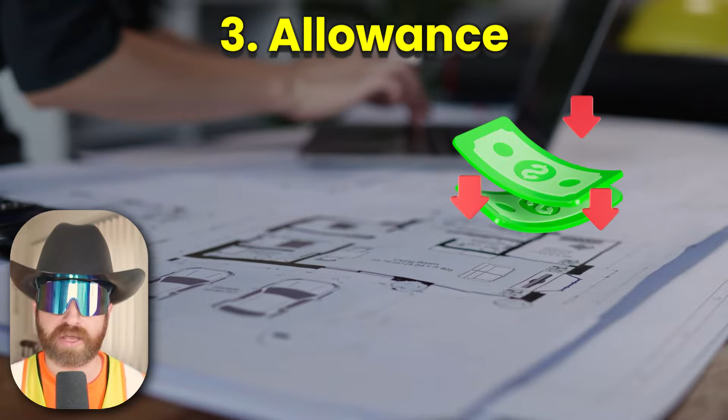Next up, we have AHJ, or Authority Having Jurisdiction. The AHJ refers to the local, state, or federal agency responsible for enforcing building codes, safety regulations, and issuing permits. Then we have allowance. An allowance is a sum of money incorporated into the contract sum in order to cover the cost of a particular scope, which isn't fully described or known in the contract documents.

At number 4, we have alternate. An alternate is a specific aspect of scope which is outlined during the bidding phase and to be priced separately from the base bid, which can later be added or deducted from the base bid amount if selected by the owner, providing the owner this option at time of bid and bid award and selection.

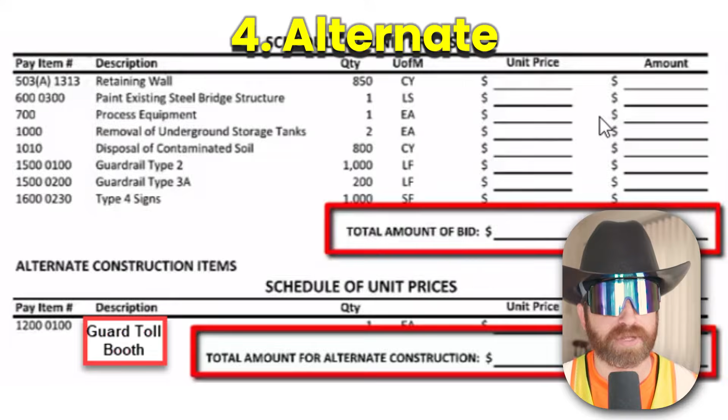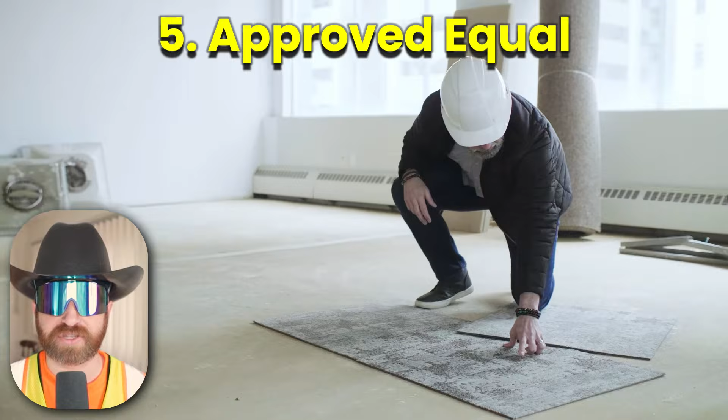Moving on, we have approved equal. Architects and engineers will typically outline a basis of design in the specifications, which is essentially the must-use material or equipment the contractor has to utilize. However, they will sometimes allow approved equals. This means the contractor can suggest the use of an alternate material or equipment, which then has to be approved by the design team and/or the owner prior to purchase and install.

Okay, now we're looking at Architect's Supplemental Instructions, or ASI. An ASI is a formal document issued by an architect or engineer to the contractor that provides some clarification, minor changes, or additional information just to clarify the intent of the original construction documents. ASIs are typically used for changes that do not affect the project cost or time, such as specifying a paint color.

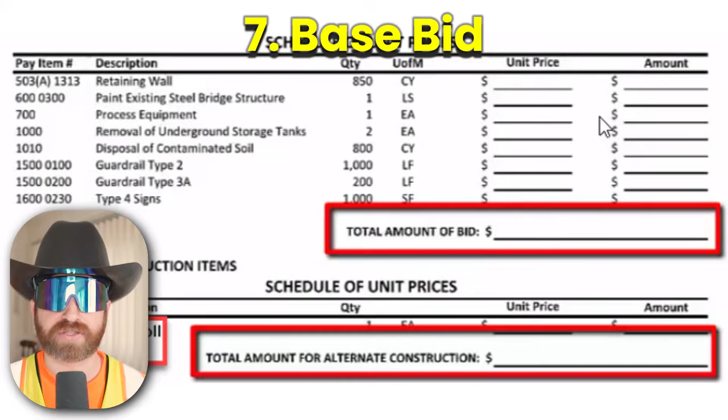At number 7, we have base bid. A base bid is a contractor's price submitted for a project scope of work. However, it excludes any additions, deductions, or alternate pricing options.

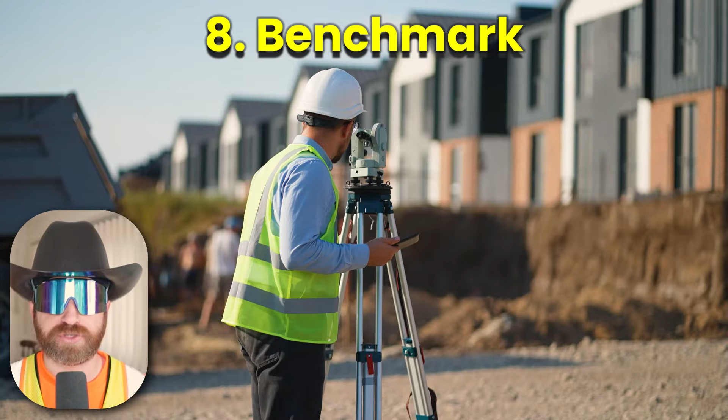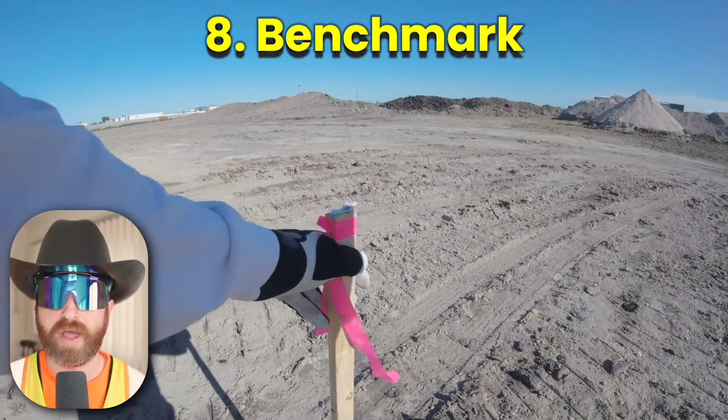Okay, let's move on to benchmark. Now, a benchmark, which is often referred to as a site control point, is a physical marker somewhere on the job site which does not move or change. It is a confirmed elevation and location marked by a surveying company that the remainder of contractors use to confirm their elevations for the installation of work.

Okay, now we have bid leveling. Bid leveling is the process of reviewing bids within the same bid package and is to ensure that the pricing between different contractors is just apples to apples. This is to help ensure that the scope is being priced completely and consistently across the board.

All right, a pretty simple one, blocking. Now, blocking is just short pieces of lumber used to fill, join, or reinforce a building structure. Blocking is installed where material is being fastened to a wall to ensure additional support, such as casework uppers, grab bars, etc. Moving on, we have burden. Now, burden refers to the indirect costs of employing a worker beyond their hourly wage, which includes expenses like Social Security, workers' compensation, any health insurance, paid time off, and more.

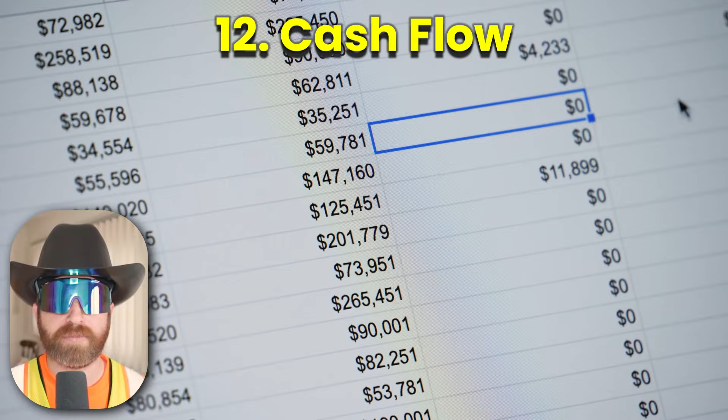Then we have cash flow. Construction projects typically involve 30, 45, 60-day payment cycles from the time you submit your payment to the time you're paid, sometimes even more. A cash flow is a forecast typically created in an Excel document of expenses such as labor, material, and equipment versus income or payments over time. Cash flows are typically forecasted on a monthly basis and are used to help construction companies and owners understand the ins and outs of payment requirements.

Following that, we have closed shop. Now, closed shop was a term used to describe areas of the country where employees were required to be union members as a condition of employment. Closed shops were deemed illegal in 1947 under federal law.

We're going to keep going with conceptual estimates. A conceptual estimate is an early cost projection based on limited project data, details, and documents, typically provided to an owner by a contractor or architect to ensure the owner is in alignment with the potential costs prior to the next steps of design and detailed estimates.

At number 15, we have constructability. So constructability refers to the ease in which the contract plans and specifications can be executed during the construction phase. Constructability review may influence design modifications during the project's design development phase. Okay, consumables. Construction consumables are expendable materials used up during a project that are not part of the final structure, such as drill bits, saw blades, grinding wheels, fuels, etc.

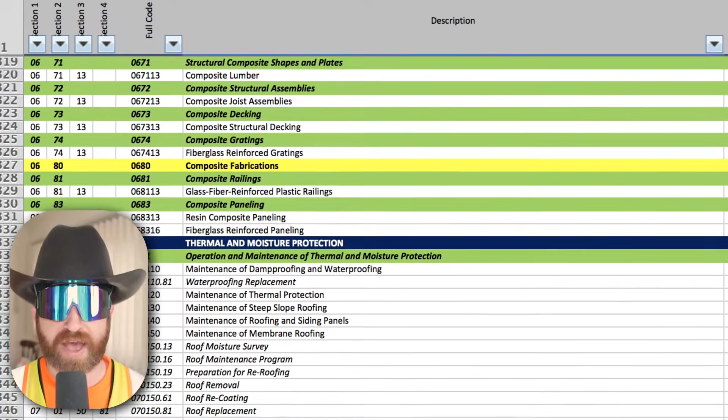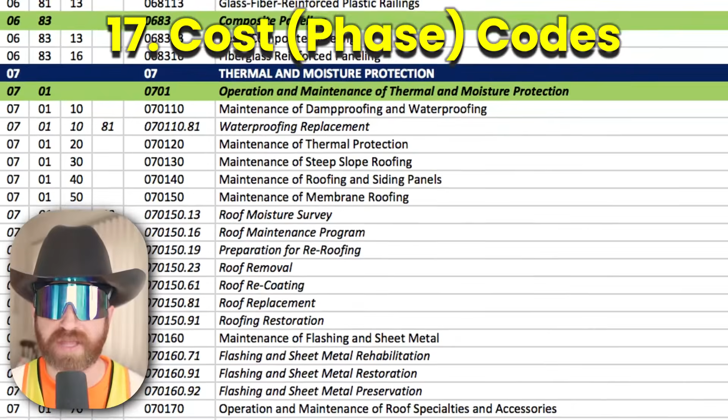Moving on, we have cost codes. Construction cost codes, or sometimes referred to as phase codes, are numeric identifiers used to categorize and track project expenses like labor, materials, and subcontractors for specific activities.

Then we have critical picks. Now, a critical pick in construction is a lift that carries a high risk completed by a crane, often requiring extra planning and safety measures. These lifts are typically defined by exceeding 75% of a crane's lifting capacity, requiring more than one crane, or when the load is outside of the operator's view.

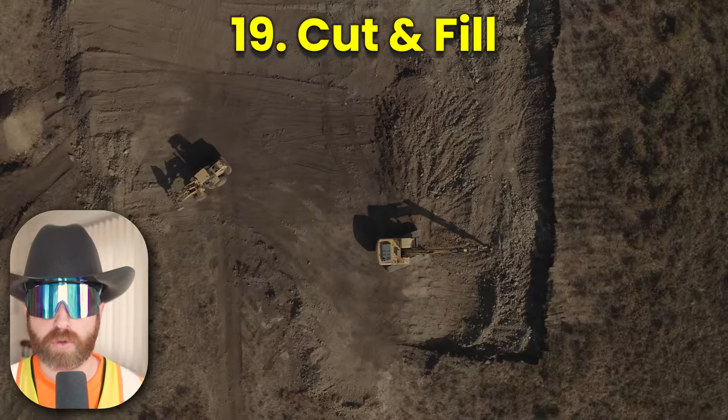Then we have another on-site term, cut and fill. Now, cutting and filling is the process of just moving earth from high elevations, which would be considered cuts, to lower elevations considered fills. Then we have daily reports.

Now, a daily report is a document filled out by a foreman or a superintendent at the end of every working day on a project or throughout the day. It captures things like weather, types of work activities taking place that day, inspections that took place that day, number of individuals on site, any safety items to record, in addition to many other items.

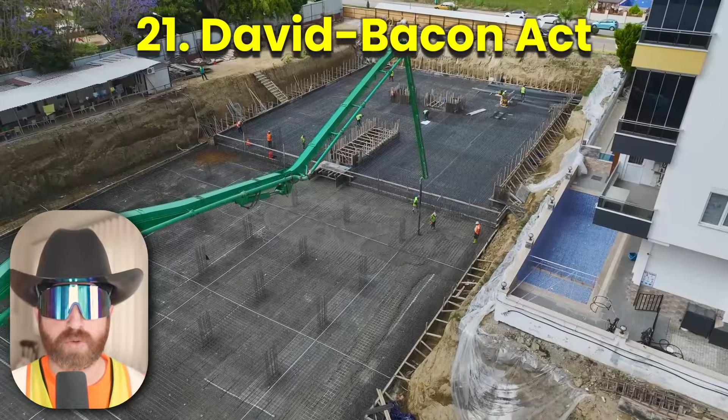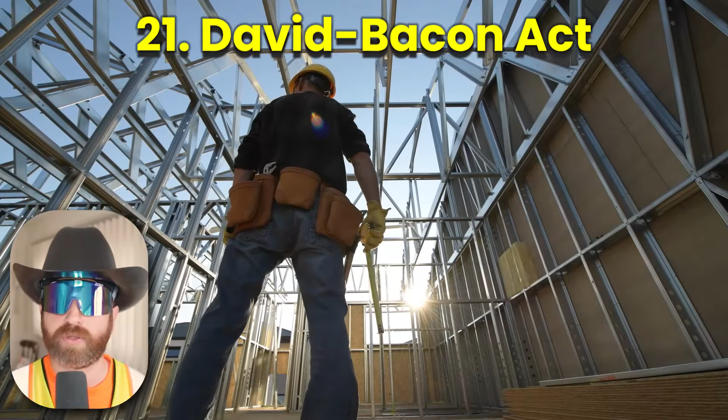Okay, the Davis-Bacon Act. So the Davis-Bacon Act requires that all contractors and their subcontractors performing federally contracted work in excess of $2,000 pay no less than the prevailing wage and fringe benefits for that geographic location where the work is being completed. All right, I'll cover prevailing wage later on in this video.

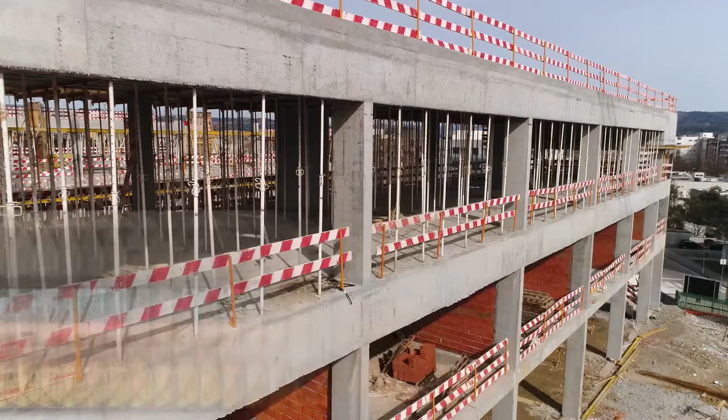Okay, getting back to business, we're moving on to dead load and live load. So dead load refers to the weight of the actual structure or building, which includes all permanent components. The live load refers to everything that is essentially movable within the building, such as furniture, people, and any other movable equipment. Now we have DFH, which is short for doors, frames, and hardware.

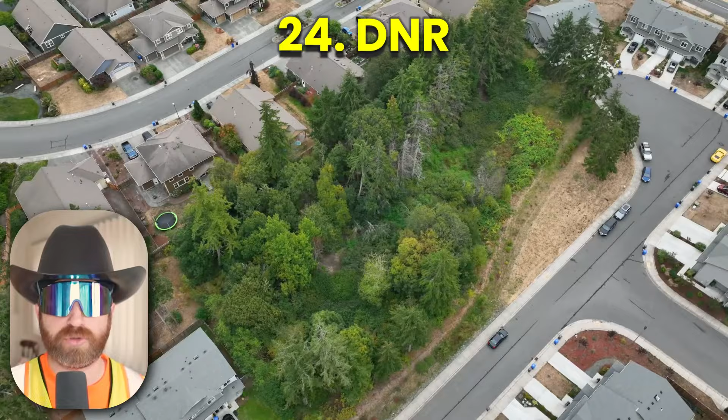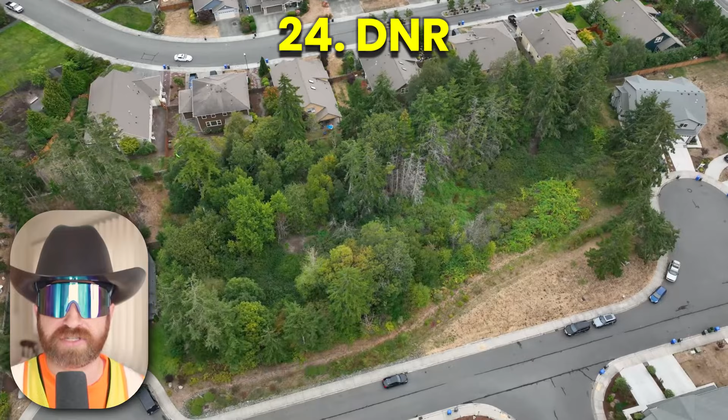You'll often hear or see doors, frames, and hardware scope abbreviated as DFH, so I'm just throwing it out there for simplicity. Moving on to DNR. Now DNR stands for the Department of Natural Resources, and this is typically applicable to site improvements or related permits where the DNR is involved with stormwater runoff and management and establishing no-build areas such as designated wetlands or protected land. After that, we have draw or payment application.

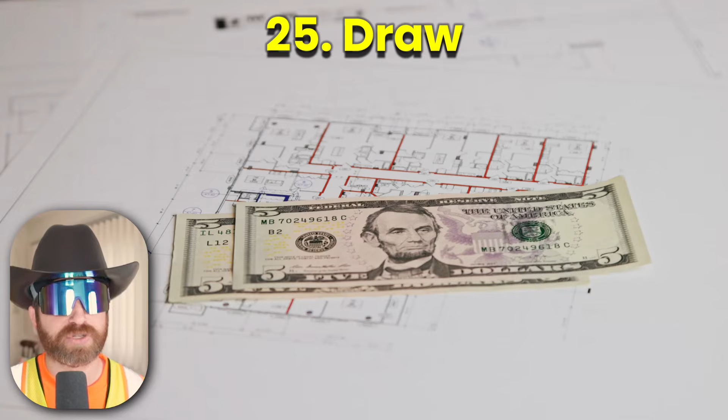Now, a draw in construction refers to the payment application where a contractor submits a bill to a general contractor or the owner directly for approval of payment, typically on a monthly basis, which is based on work performed or completed to date. Then we have easements.

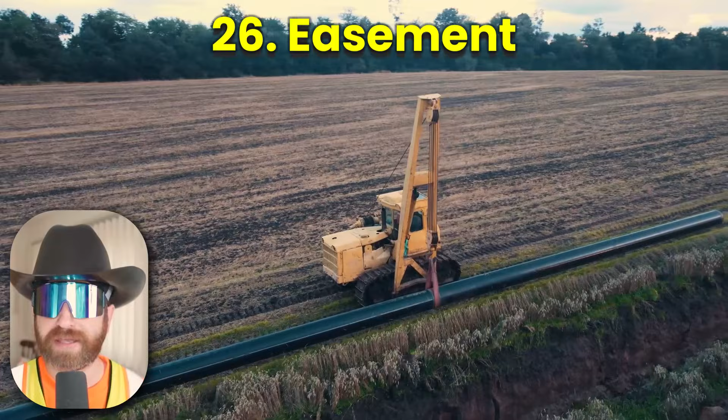An easement is a legal right for someone to use a portion of another's property for a specific purpose. For instance, public utility companies typically have easements onto other properties for the extent of their underground electric and internet data lines that make their way into the building. This allows the public utility company to access that portion of land to service those utilities. You typically cannot build on easements without signed approval from the easement holder.

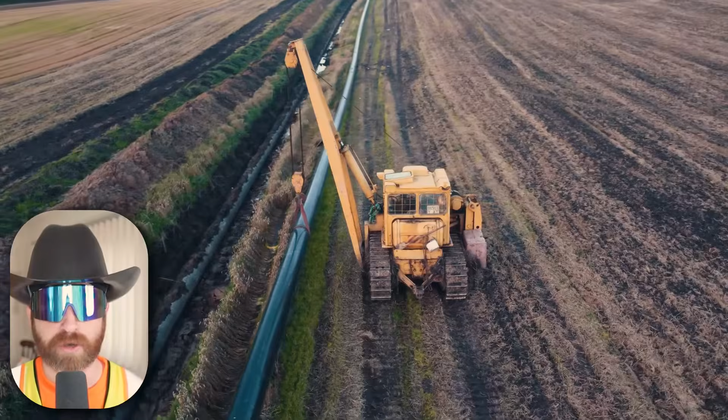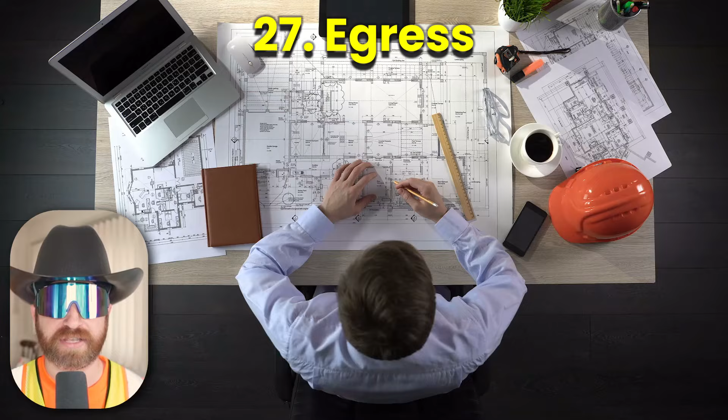Up next is egress. So egress is a continuous, unobstructed path for people to exit a building and reach a public way such as a street in a safe manner. Egress pathways are based on occupant load and other safety code requirements.

At number 28, we have EMR. Now, EMR stands for Experience Modification Rate or Rating, which is based on a company's worker compensation claim history compared to the average of its industry and size. It's essentially a company's safety rating, with 1 matching the industry average, any number under 1 is better than the industry average, and anything above 1 is worse than the industry average. After that, we have envelope.

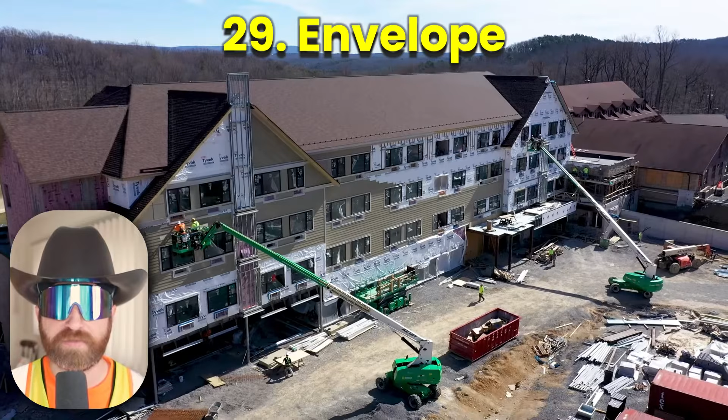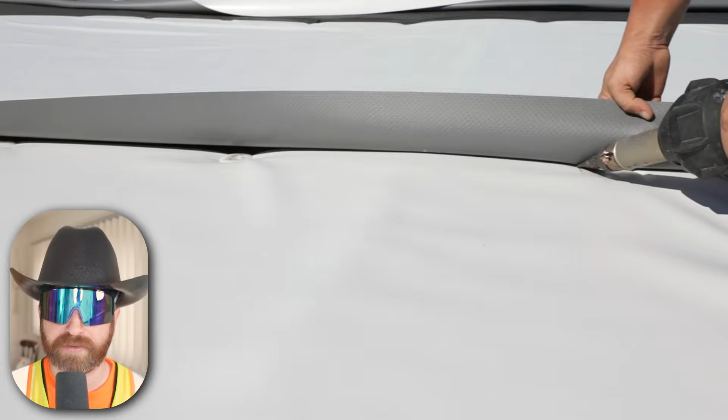Now, the envelope of a building stands for the outer structure, where the waterproofing elements of a building enclose the outside from interior conditioned spaces. Moving on to another site or earthwork term, we have erosion control. Now, erosion control in construction involves the use of barriers or physical controls to prevent soil erosion during the course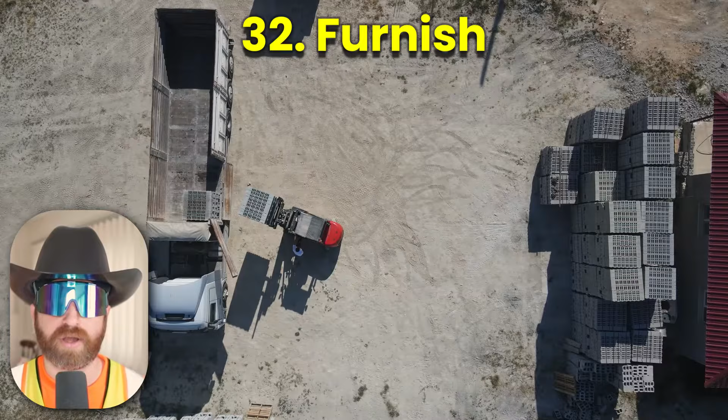of a construction project. Next up, we have FF&E, and FF&E is just an abbreviation used to denote furniture, fixtures, and equipment on a construction project. Then we have the term furnish, which is oftentimes found in contracts and in construction. To furnish something means to supply and deliver materials, equipment, or labor to the job site so that they are there ready for use or install.

Okay, now we've got a scheduling term with a Gantt schedule. A Gantt schedule is a visual representation of a project timeline using horizontal bars to show tasks against a calendar. Back to our earthwork, we've got grading. Now, grading is the process of reshaping land on a construction project. A site grade is an established point set by a civil engineer in the construction documents that an earthworker would use to establish the height of the reshaped land.

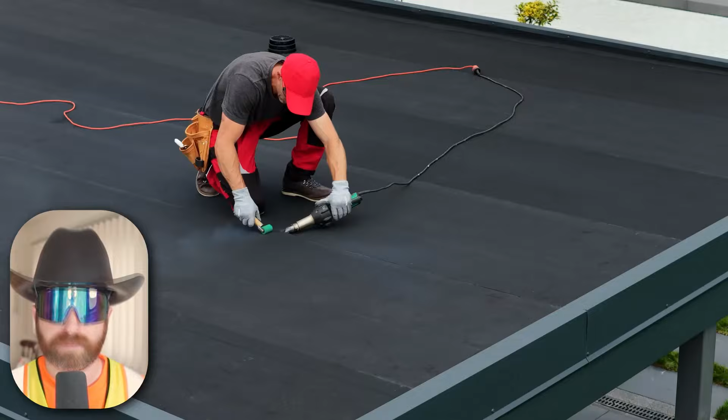All right, green building. Now, green building in construction is essentially the practice of designing, building, and operating structures to be environmentally responsible and resource efficient throughout their entire life cycle. At 36, we have leading edge. Now, in construction, a leading edge is an unprotected or active edge of a roof, floor, or deck. This creates a significant fall hazard and requires workers to be tied off or monitored while the scope is being

completed. Okay, let's talk about lean construction. Now, lean construction is a construction methodology that aims at achieving a reliable and predictable workflow while reducing waste on a construction project. There's a lot more that goes into lean, and I will probably make a video of its own in the future. Okay, let's talk about LEED. Now, LEED stands for Leadership in Energy and Environmental Design, which is an established rating system that assigns points towards material use, construction practices, efficient building design, and more. It's tied to green buildings and sustainable design.

All right, one of my favorites is a lessons learned. Now, lessons learned in construction are essentially the process of documenting successes and failures throughout a project, which is often used as a knowledge share to other individuals to prevent similar mistakes from happening or to go about with an approach for a successful operation on the construction site. At number 40, we have the dreaded liquidated damages. Now, liquidated damages in construction is a pre-agreed sum of money, typically a daily rate, that a contractor has to pay to the owner for each day of delay past the contractual completion date.

Oh no. At 41, we have markup. Now, markup is a percentage added to the total cost of a project, scope, or change order to cover things such as insurance, bond, and fee. After that, we have MasterFormat. Now, MasterFormat is the standard for organizing construction specifications established by the Construction Specifications Institute, or CSI.

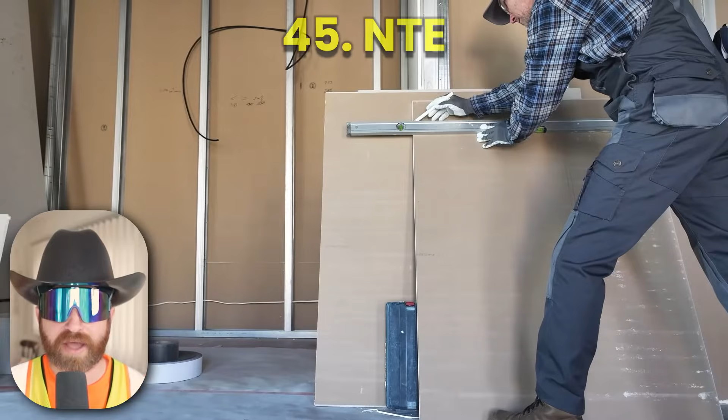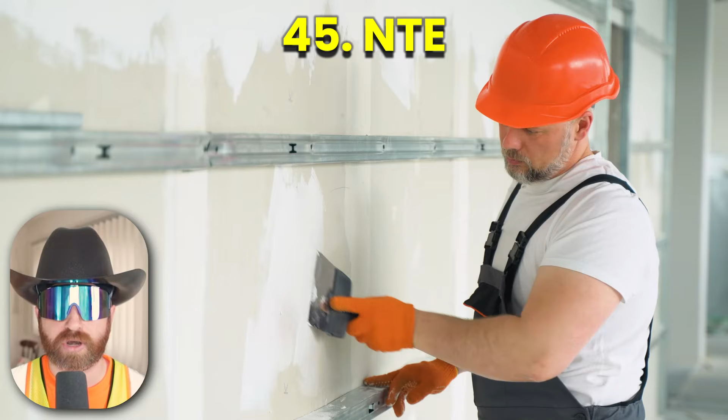All right, now we have NTE, or not to exceed. An NTE in construction is a contract or change order that means not to exceed a certain price. In this contract type, a contractor's expenditure and scope of work are limited to this value or under this value unless they are approved to exceed the set dollar amount before moving forward with the work. Then we have OCO and SCO. Now, I talked about COs, which are change orders, in my last video. OCO just stands for an owner change order, and SCO stands for a subcontractor change order.

Now we're going to talk about everybody's favorite day on a construction site, occupancy, which essentially allows an owner to open the doors for its intended use after construction is completed and inspections have all been passed. At 48, we have open shop, which is the complete opposite of closed shop. Open shop in construction refers to a workplace where the employees are not required to join a union as a condition of employment.

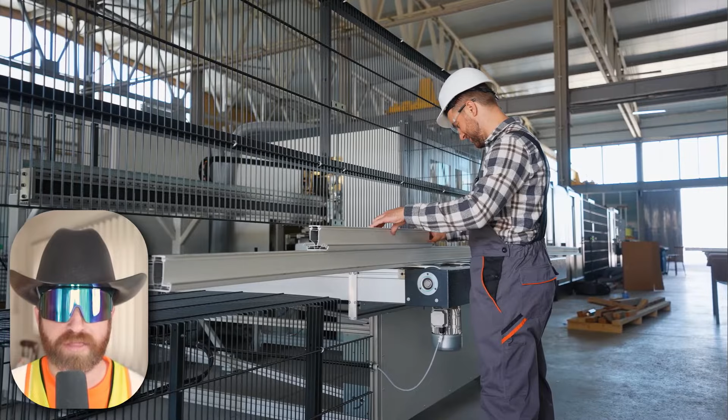Then we have prefabrication, which is a construction method that involves manufacturing building components or entire structures off-site in a factory, a warehouse, or another controlled environment, which is then to be installed or erected more simply once it's delivered on site.

Moving on to prequalification. Now, prequalification is the process of evaluating a contractor's ability to complete a project before they submit a bid.

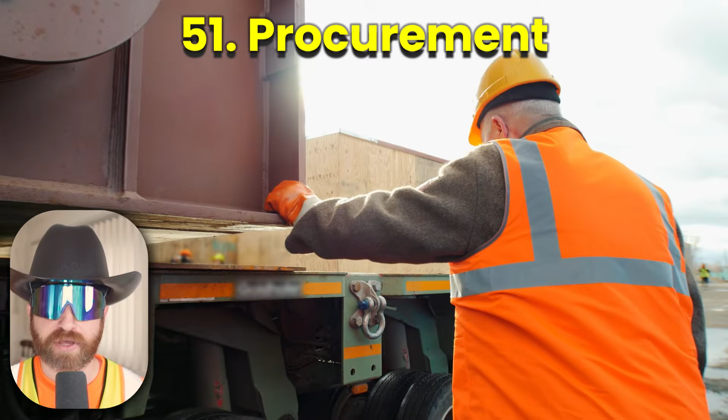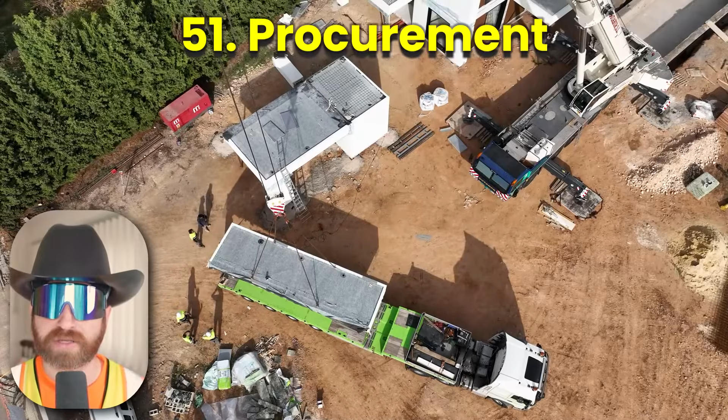Next up, we have procurement, which I've talked about at length in previous videos, and I'll just hit it again. Procurement is a process of acquiring all necessary goods, services, and resources for a construction project, including materials, equipment, and labor. More often than not, it's specifically referred to when talking about material in construction.

All right, I said we'd return to prevailing wage. Now, prevailing wage in construction is a requirement for public works projects to pay workers the average hourly wage and benefits for the local area. Federal and state laws mandate these wages, which then are set by the government based on data for different job classifications in counties.

After that, we have purchase orders. A construction purchase order, or PO for short, is a legally binding agreement or document issued by a contractor to a vendor for materials or equipment, which doesn't typically require site labor. A subcontract is similar. The only difference is that a subcontractor usually has associated labor involved.

All right, the programming phase. Now, the programming phase is a pre-design stage where the project's goals, needs, and criteria are defined before the actual design starts. Usually, a team of architects working with stakeholders, sometimes some contractor involvement, and then they move to the actual design stages.

Now, here's every contractor's favorite part of the job, progress payment. It's a scheduled payment or partial payment made during the work process to cover costs of the work completed or material delivered to the site, coming after the submission of a draw or a pay application. Cost is submitted on that monthly basis, and then the progress payment is made based on the contract payment terms.

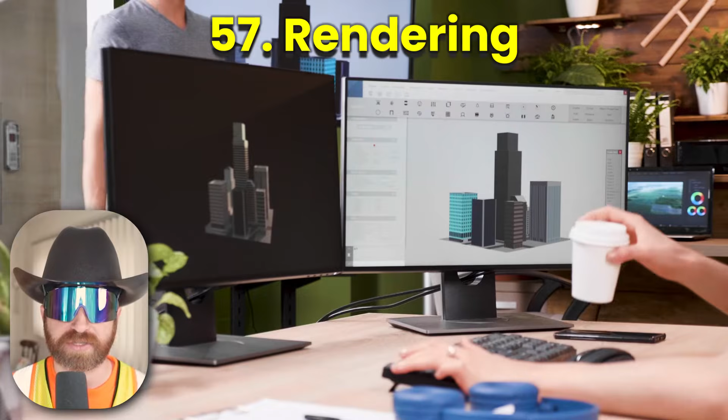After that, we have renderings. Now, a rendering is a photorealistic 3D image produced from modeling software or those 2D sets of drawings that we see that reflects really what the project is going to look like or an area of the project upon completion.

All right, we got another payment term with retainage. Retainage is a portion of a contractor's payment which is withheld until the project is substantially complete to ensure that the work is finished properly and according to the contract terms. Retainage is typically 5 or 10% of the billed amount on a monthly basis.

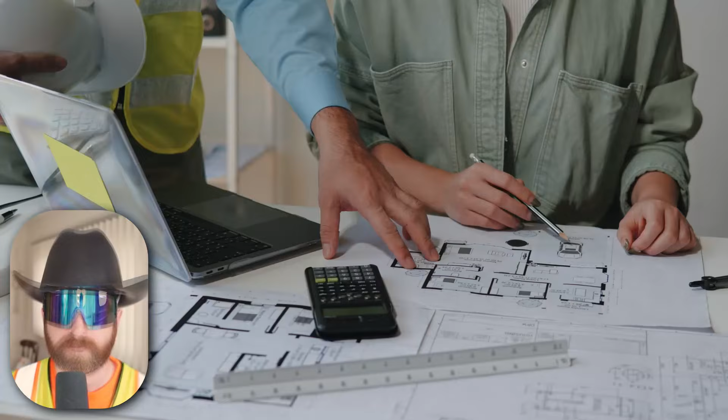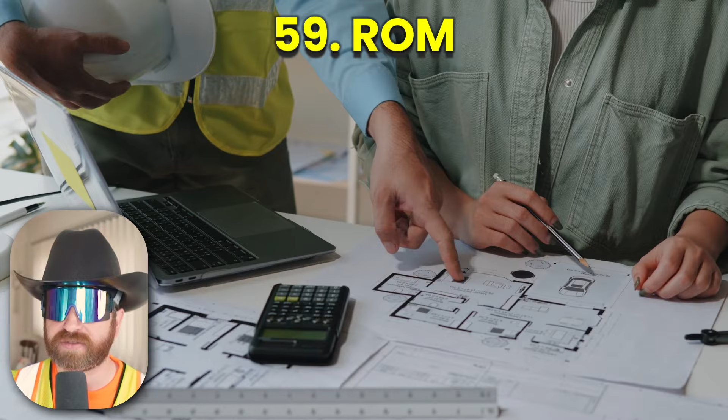Another estimating or pricing term, we have ROM, which stands for rough order of magnitude, and is just a rough estimate of costs and time when a detailed estimate cannot yet be completed due to insufficient information or time.

After that, we've got another site term with rough-in. Now, rough-in is the initial construction phase where electrical, plumbing, and HVAC systems are installed within the building's framework, but before the walls are closed up with drywall or other materials.

At 61, we have scoping. Now, scoping is the process of a contractor reviewing a subcontractor's bid to ensure that the scope of work on the bid matches the requirements needed of the actual scope of work.

And then directly following that, we have a scope gap. A scope gap is a specific aspect of scope required to be complete in the contract documents that was missed or not captured as part of the scoping process by a contractor or a subcontractor.

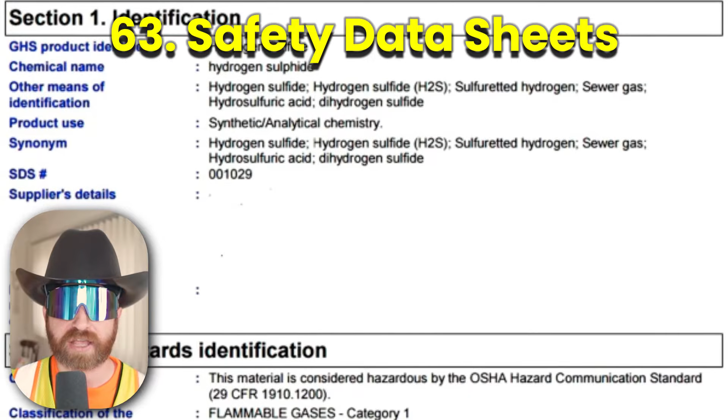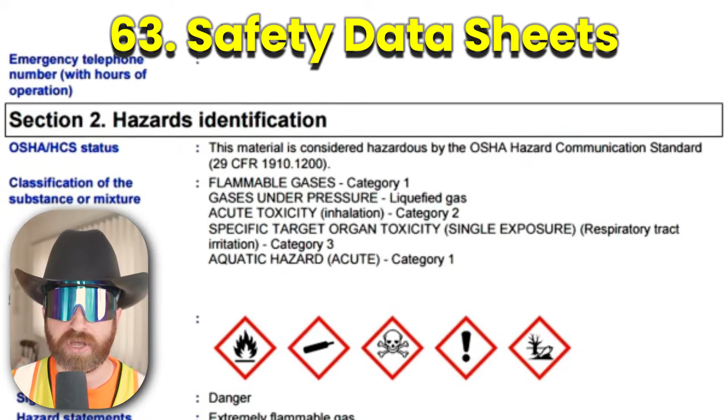All right, now we have SDS or safety data sheets. These are documents that provide information about hazardous chemicals or products used on construction projects, including the properties, hazards, safe handling procedures, and most importantly, what to do in an emergency if you come in contact with those products.

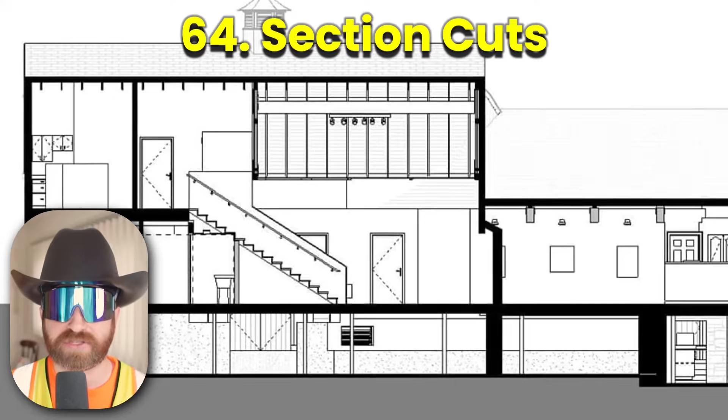Then we have section cuts, which I do talk about in my drawing review videos. This is just an imaginary vertical slice through a building on a set of drawings, used to reveal interior structure or walls or elevations, relationships between spaces, and the construction details that are not essentially visible on the plan view.

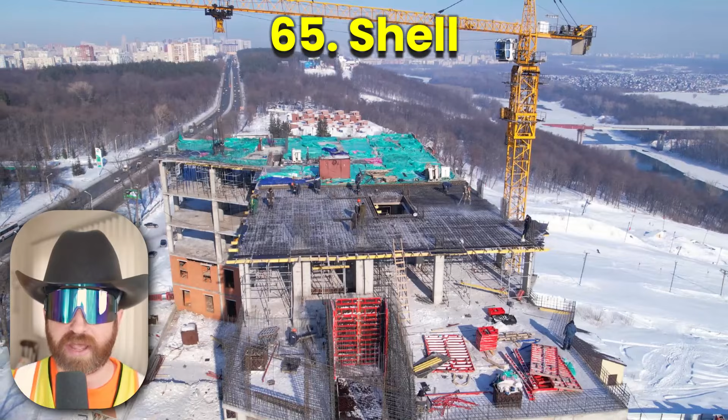At 65, we have shell. Now, the shell of a building is essentially the basic structure, including the foundation, framing, structural components, exterior walls, and roof. After that, we have slack or float, and these are just scheduling terms that refer to the amount of time an activity can be delayed without impacting the project's overall end date.

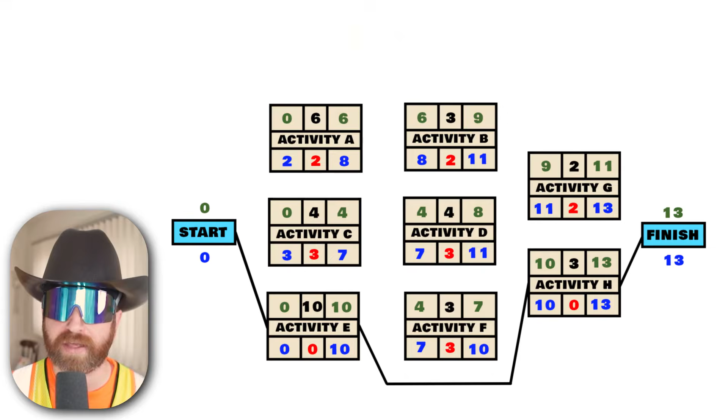All right, now we have staging. So staging can have two meanings, such as setting up temporary platforms and scaffolding for workers, but I more often hear it referred to as a designated area on site for storing materials and equipment for upcoming install or future install. A term we more often hear in residential construction or large-scale wood or timber construction is stick-built. Now, stick-built is essentially an on-site or site-built construction, piece by piece, using pieces of lumber or sticks.

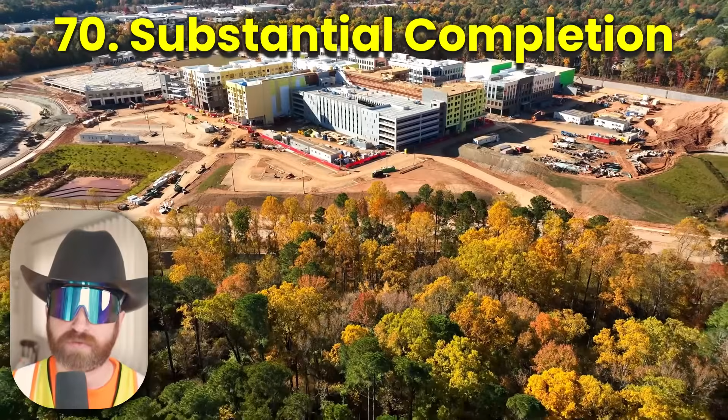Following that, we have subcontract. Now, a subcontract is a secondary contract where the general contractor or a larger contractor hires another company to perform a specific part of the original contract's work or scope. All right, we're getting close to the end of this list, and close to the end of a project, we have substantial completion. And substantial completion is just the stage in which a construction project is finished enough that the owner can use it for its intended purpose.

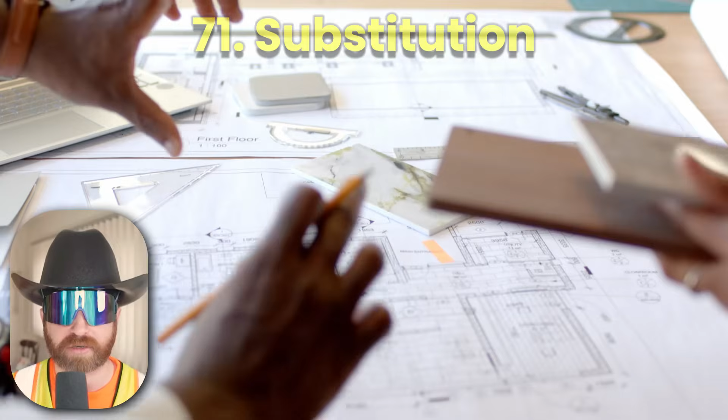After that, we have substitution. Now in construction, a substitution is the process of replacing a specified material, product, or method with an alternative, which is oftentimes used to save costs, improve lead times, or even enhance performance of that product. Then we have TAB, or testing, adjusting, and balancing. Now, TAB is the process in which an HVAC system is fine-tuned to ensure that it performs according to the engineer's design specifications.

All right, now we have Toolbox Talks, which are just short safety meetings each morning led by a foreman or a superintendent, which are to discuss job site specific safety hazards, safe work practices, and other relevant topics. All right, we got a fun one with topping out. Now, topping out is when the uppermost steel beam or member is installed in place, signifying that a building has reached its full height and that the structure is essentially complete. It's often accompanied with a site ceremony or celebration of individuals involved with the project that'll come out and actually sign this structural beam or member prior to it being lifted in place, and it's celebrated as an accomplished milestone.

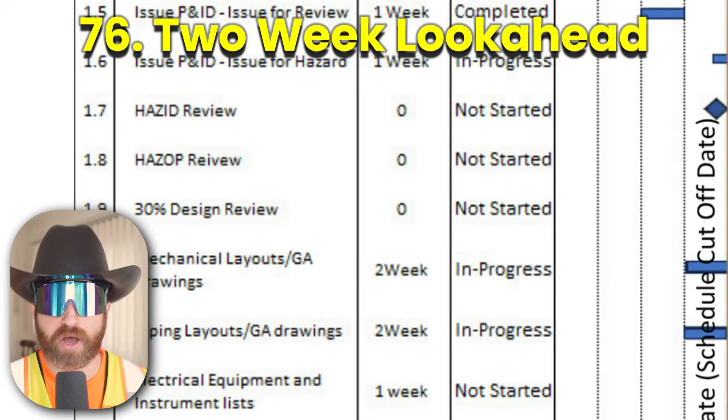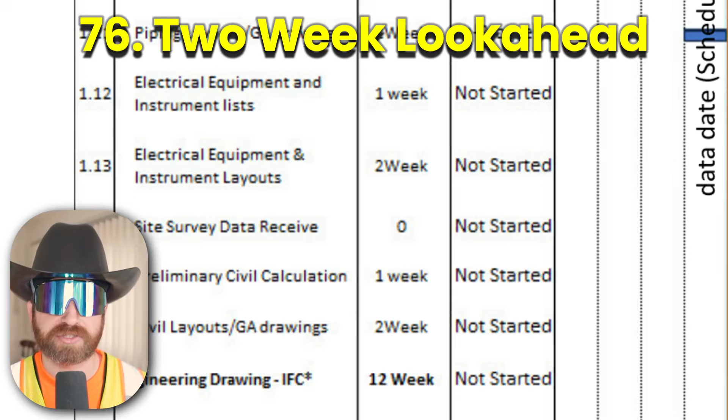Then we have turnkey. Now, turnkey is just a project that is delivered completely finished and is ready for immediate use. The term turnkey essentially comes from you hand over the keys to the owner and then they can open up their building, walk in, and just use it. After that, we have 2, 3, and 6 week look-ahead schedules. Now, these are detailed schedule breakdowns to look forward at the next handful of weeks or months to specifically focus on upcoming activities and possible constraints that may prevent those activities from happening, versus looking years down the road or further months down the road in the overall schedule.

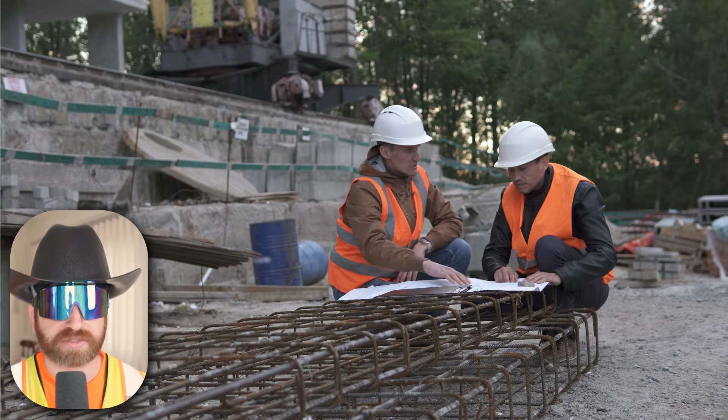At 77, we have unforeseen conditions. Now, these are unexpected issues that arise on a project site, such as hidden physical conditions or hazards underground that would differ from what was anticipated. Unforeseen conditions are not accounted for in the original schedule, design, budget, and they can often lead to project delays or increased costs. Following that, we have Uniformat. Now, Uniformat is just a standard for classifying building specifications, cost estimating, and cost analysis.

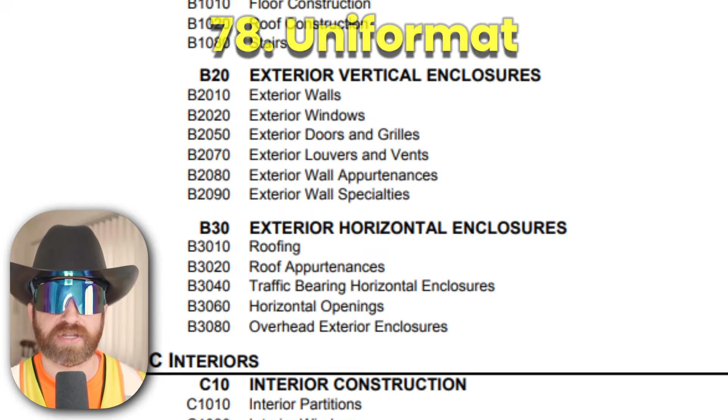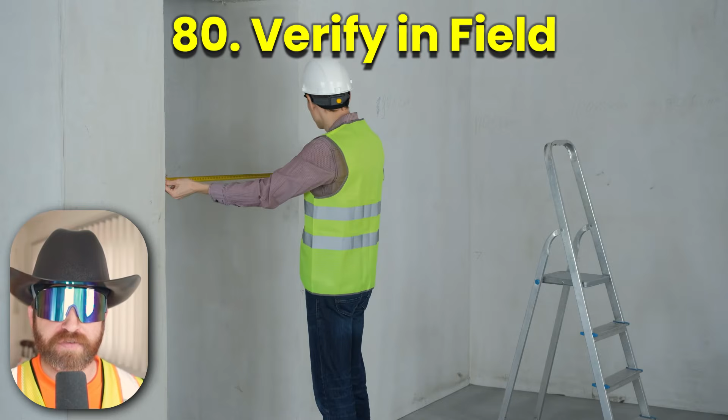Then we have Unit Price. In construction, a unit rate or a unit price is the price for a single measurable aspect of work, such as the cost per square foot of flooring or the linear foot price of installing a pipe or something similar. And we've made it to the end of the list with VIF, or Verify in Field. VIF is a construction and a design term that means measurements and details from a drawing must be checked or verified against the actual site conditions before that work begins.